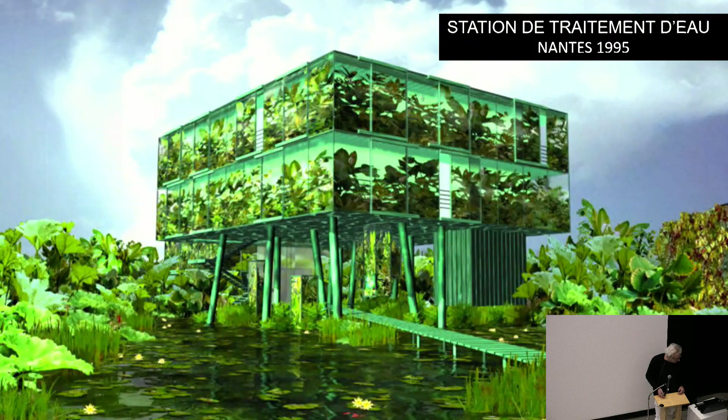This is another very old building I did, I think in 1995. It was the headquarters of a water treatment station. This picture was probably one of the first computer-generated images calculated in Canada. At this moment, the computer in France wasn't strong enough, so it was calculated there and sent back.

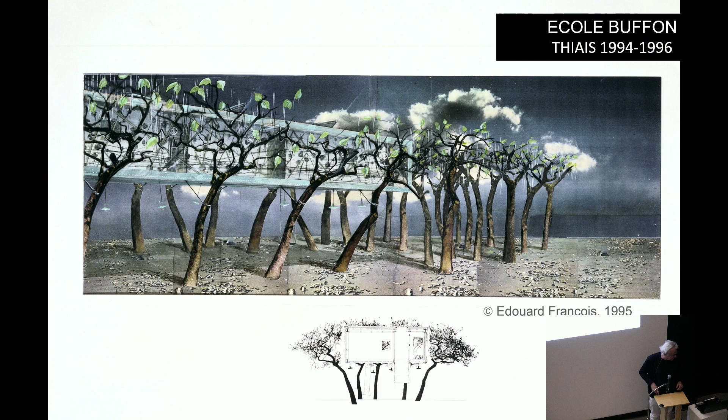It was being realized, a very, very important cantilever, so the children are in a sort of cloud over the floor.

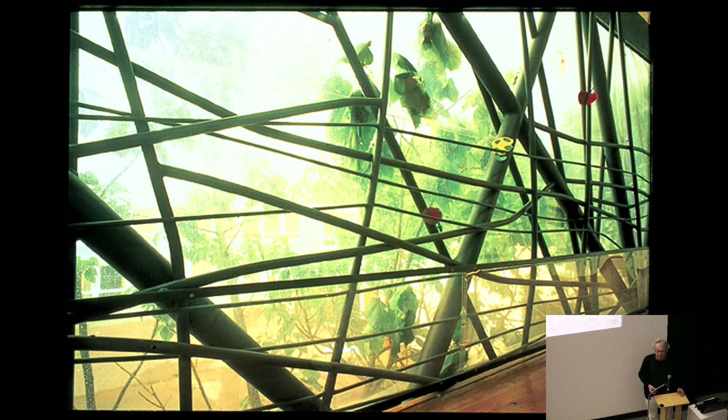The beam was something extremely challenging. This is the main beam. I didn't want the beam to look like a beam, so I designed it myself. I asked the engineer to calculate how big each tube must be, but told him he mustn't change the tubes. That's why you have very small tubes and very big tubes, and it was a very efficient beam.

This is from 2000, so 20 years ago. It was my first big commission: 60 flats in Montpellier, with a private developer. Private developers are quite difficult to manage because these guys only think about money.

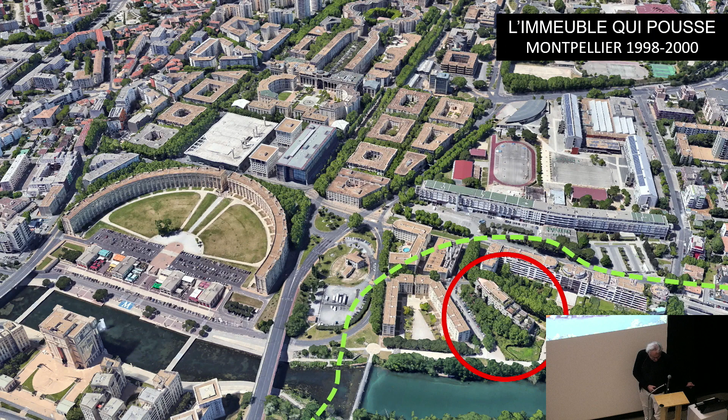It's like doing a tauromachie with a torero, and the client is a big bull and you are afraid. So when you have this kind of individual, you have to show models that are unbelievably strong, so they must be totally afraid. If they're afraid, they don't approach you, so you could have a conversation.

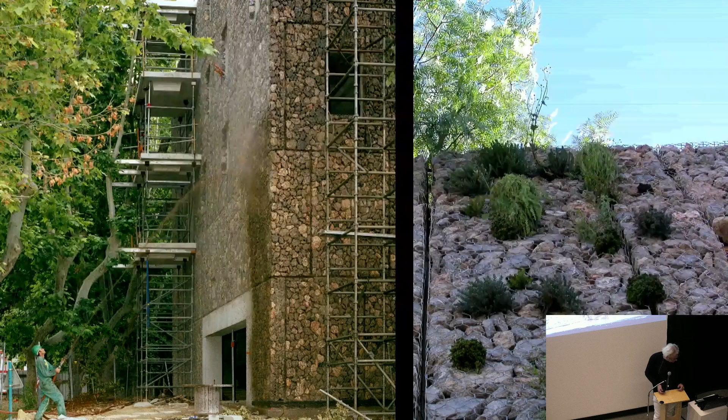It was a building in Gabion. I did that before Herzog & de Meuron did the winery. I have some relation with Herzog & de Meuron — you will see my project, and there's a lot of projects that are quite near, just 1 or 2 years after. We know each other very well.

So I was focused on making my building green. This building is for housing, and I asked the Minister of Culture to pay for shit to paint the building with seeds.

It was Jean-Jacques Aillagon, in 2000, and he said, wait, this is a very nice idea, Edouard, because my client didn't want to paint the building with shit, big shit. So it was the Minister of Culture who provided the funding. You see the guy who is painting.

See the guy here? This is shit, big shit, and he's painting the building. My poor client, when he discovered that, he was totally afraid, and it was a scandal in the city center because it was smelling horribly in all the city for 2 days.

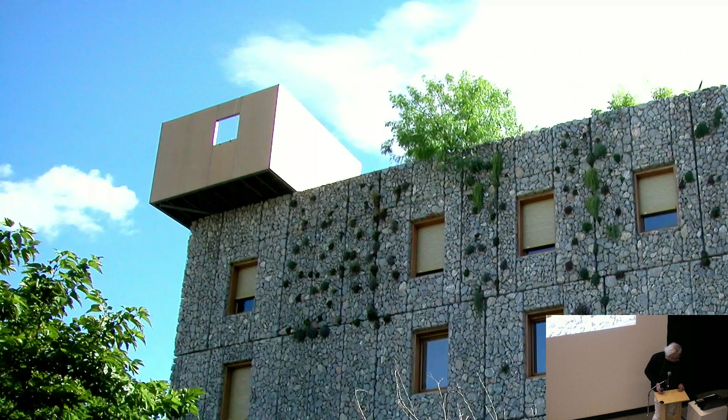After that, you have plants that go out of the gabion. You could see the balconies. This was an existing tree, and I didn't want to cut it, so I put just a balcony on top of it. You see here the vegetation is growing directly on the facade. This is a pilot of an Air France company who bought that, and I put a box for him that is in cantilever because he liked that.

And how did I get this commission? This is another story. It was one of the first new luxury hotels in Paris, a palace. I had been convened by the architect, a historical architect, and they said to me, Edouard, we had a meeting, and we allowed you to do a green building, a green facade.

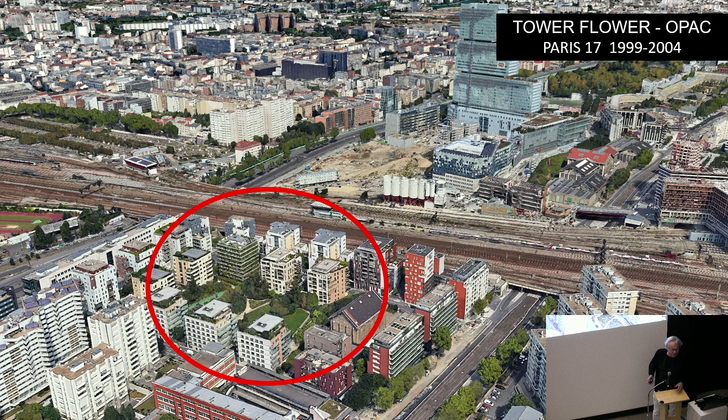And the dream of Christian de Portzamparc was to have the buildings behind that look through, so everybody is looking at the same moment at the park. And so we crossed that, and Christian de Portzamparc did a competition that I knew I would win. It was an arranged competition. In France, we used to do that sometimes.

This is the building, and this is the park, and my building, whose name is Tower Flower. At this moment, I wanted to do this building, this one, and to do a sort of very green space. I wanted to do a park also. I wanted to do a big waterbed, so when you walk in the park, you have waves of green.

But Christian de Portzamparc and the city of Paris said, stop, you do just this one and it's finished. So bye-bye the waterbed, the green waterbed with grass on it.

When you are dealing with plants, plants are so pretty that if you make the building behind it pretty also, everybody will vomit, it's too sweet. So you need to have a building that is very, very bad. So the whole building is in concrete, everything. And then after that, you have the plant.

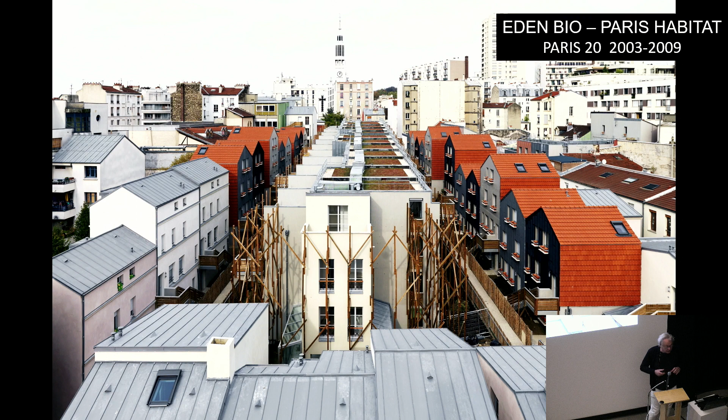And to make all this huge block correctly connected to the city, I designed these buildings - this is something that is very important in my work. I designed these buildings there, here, and these ones that are a copy of existing buildings just nearby. So it's difficult to see if it's existing or not existing. The things are fitting together. For example, this is a building that was existing. So try not to demolish everything and try to make your urbanism totally connected with the context.

This was the first image, when we delivered the building. I put all the money in the soil, and I put very small plants that cost €1. This was a tree that I liked. It's another story, but look, all that cost €1. And I put all the money in the ground.

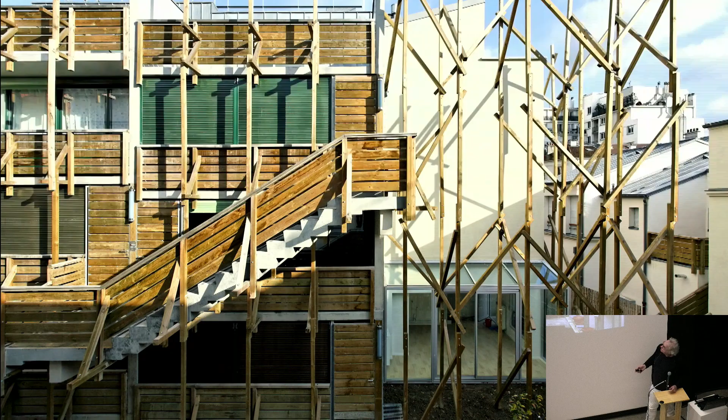I put organic earth, Demeter, 1.5 meters deep, so it was extremely costly to put all this ground. This is expecting plants that will arrive, and it will be a wild garden. You see, there was quite nothing. And in 3 years, it becomes totally a wild area with plants that are exuberant.

I will show you. So this is how it was with the model, how it was at the beginning, and what I expected. In 2018, look, it's totally green, and now the plant and the building are totally connected together, and it's dealing with the problematic of seasons. Sometimes you have flowers, and the guys are living inside that sort of green building.

You have the streets here. I wanted - I like very much the staircase when they go to the sky. And so you go to your flat, taking here, and then you go to your flat, you go to your flat, and you go to your flat. And it is inside a big block. And inside the block, you don't need to have an entrance with a corridor that goes to an elevator. It's better to go directly looking at the sky, and then you enter your building.

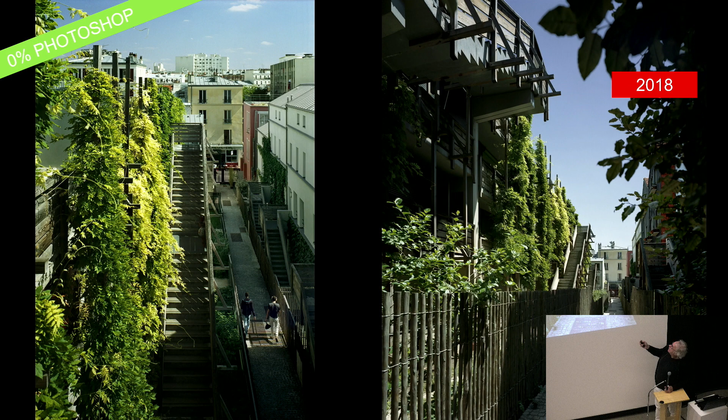Quite recently, in 2010, it was the first tower in Paris, a new tower here. And so the town mayor made a competition that I knew I would win because it was totally organized - they wanted a green building for the first new towers, because the problematic of towers in Paris had been stopped in 1970 by President Giscard d'Estaing, who said, I don't want to see towers from the Élysée. And so it was stopped.

And the first new tower in Paris is 50 meters high. It's a small tower for you, but in Paris it is something very big.

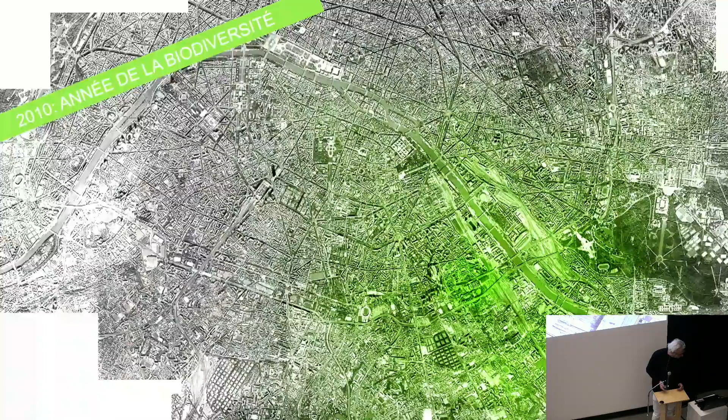And imagine a tower that is dealing with biodiversity. So on the top of the building, all the plants will be totally wild. We will go with the students into the forest to find seeds. And the quality of the biodiversity of the seeds - when they grow, they will disseminate seeds wild in Paris to regenerate the biodiversity of Paris.

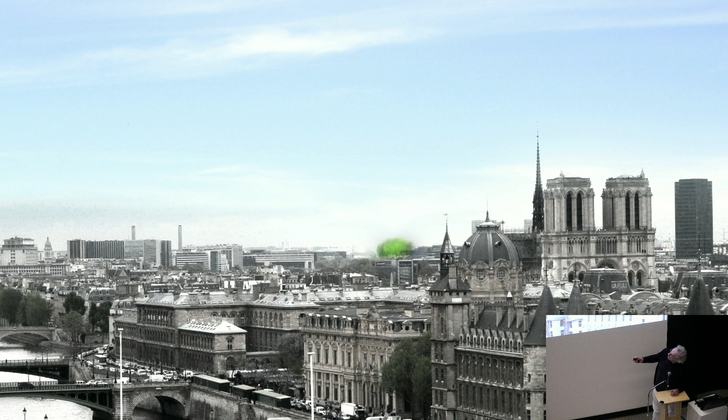This is the image for the competition. I said, yes, this is my building. And they said, oh, Edouard, it's very nice, we don't see anything. And they asked me about this little building - they said, is it an extension of you? I said, no, no, it's a tree. Oh, it's okay. And this one also, I said, it's okay. So it was the most politically correct picture for new buildings, new towers in Paris.

That was the models.

This is one plan. Here you have balconies. Here you have a sort of pathway. And here you have the pots. And the pots are just 30 centimeters diameter and 3.5 meters long.

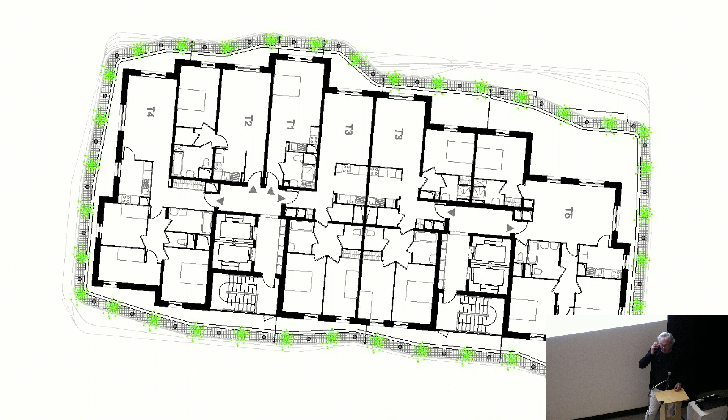I was dealing with the botanic guys to find plants that like deep pots, so we make very deep pots, and the roots go 3.5 meters deep. So they like it very much. You have this kind of plants you find in the mountain, where the roots go in sort of holes in between the rocks.

These are the details of the tubes. A big tube in stainless steel. This is the automatic irrigation.

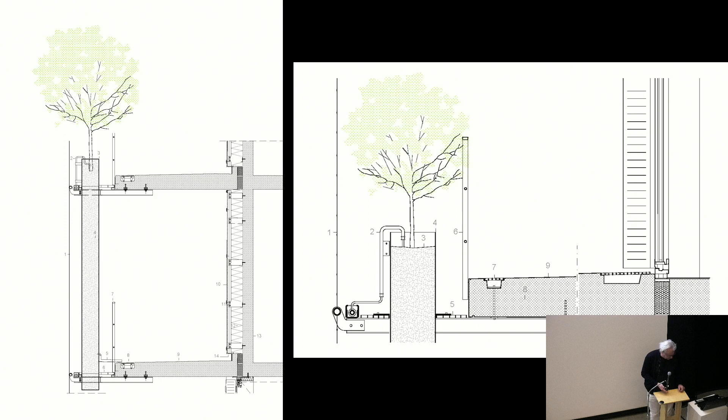With the students, we go in the forest to find the seeds. And this is a botanic garden, and these are the plants that come from seeds that were taken by the students. So they were educated without water and without engrais, without Monsanto.

You have to know that plants, they are like humans, they are drug addicts. So if you give them a lot of food, a lot of water, after that they say, please, more. In nature, they have very little water and very little food, and then they are very strong.

It's a little bit like a cat. If you buy a cat from an industrial gardener and put it in your garden, after 2 days the cat is dead. If you buy a wild cat and put it in your garden, after 2 days the cat is not there. He's gone.

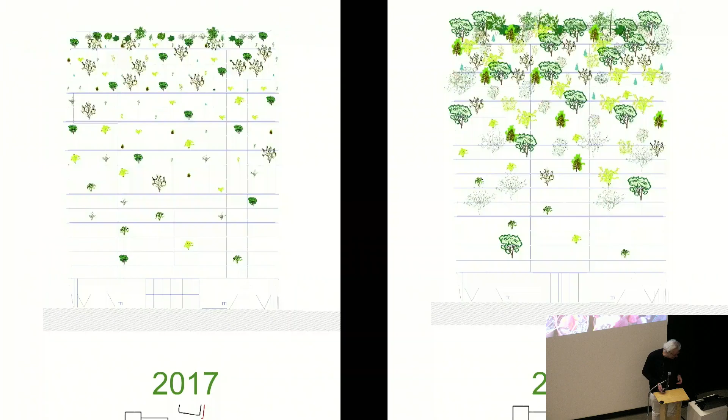This is how the seeds will grow. You have very small plants, and then it grows a little bit more and a little bit more. So for this project we did experimentation. These are the tubes, on top are the plants that we put to make them grow. So they are very small.

I'd like to deal with patience. Everybody, when they are dealing with nature, wants the thing to be totally green immediately. Sometimes, to go slowly, it's a process. So it's a very interesting process.

So we put the tubes here, and some tubes directly inside the ground, because we want to observe: when the tubes are outside with the sunshine, they get hot, and when they are inside, the temperature is quite stable. But finally, it grows better in tubes that are outside.

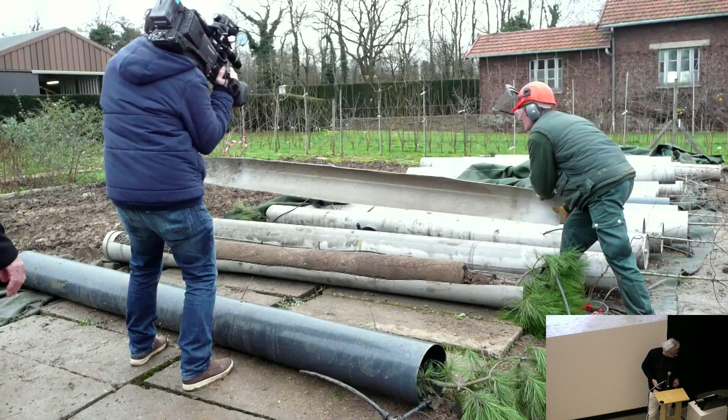At a certain moment, we have to close the experimentation, and we have to cut the tubes to see the progression of the roots. You see here, the roots are growing inside.

The television in France, they like very much to come in my office because I'm quite a funny guy. They said, Edouard, do you have something? Because we want to do a reportage on your office that is very interesting. I said, yes, we are cutting tubes, it's the end of experimentation, and we will open it and see if the prototype is okay or not.

And I said, yes, but it is risky for the project because we will do that live. I said, that's okay, we will do it live, this is life. And so this is the guy who is making the film for the Friday evening news.

The progression of the roots was incredible, you see, they were 3 meters long. So that means the experimentation was correct. At first the plant didn't grow very much here, but it prepares the roots. So we know the building will be green in probably 6 or 10 years.

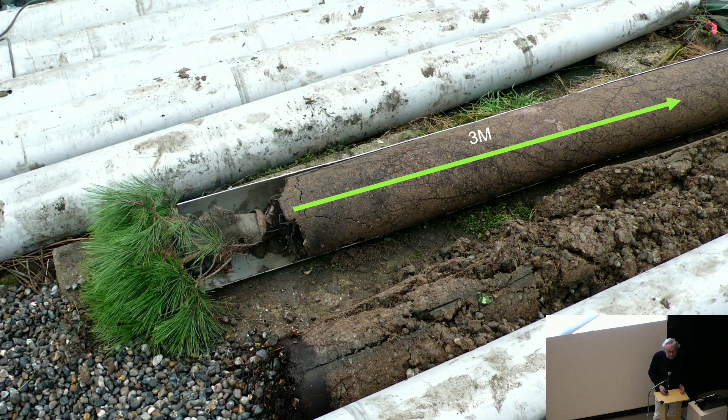Expecting the plants to be big, I chose to put a material here that deals with a future green. And I had the intuition that it could be titanium. It's a green titanium. This is the color, the natural color of titanium.

Nobody knows how to do it. It's very, very difficult to find titanium like this. And I found a guy in Japan who was making glass like that for a tea ceremony, in titanium, colored like that.

So when you put titanium in water with electricity, the color naturally changes. And the Japanese guy agreed to extend his factory ten times bigger to produce the facade of the project in France. So it was a very interesting experimentation.

We went to Japan, to this ephemeral factory, to see the guy producing all the titanium. And I chose titanium because we have to deal with the recycling problematic.

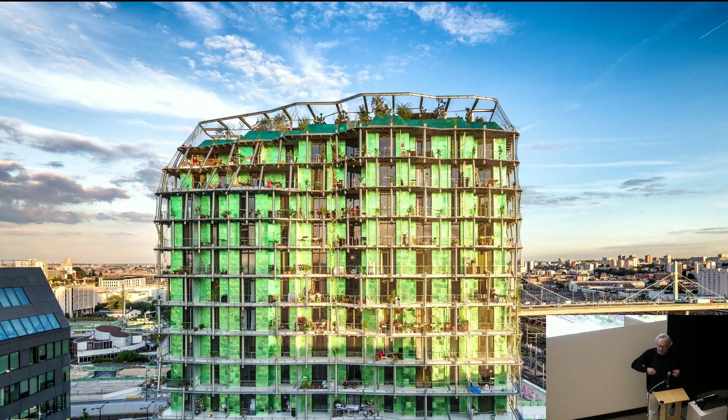This is the titanium facade, piece of titanium. This is the building. Different views of the building. You see the plants that are growing slowly, and we have oaks that grow very quickly in this tower, in this condition.

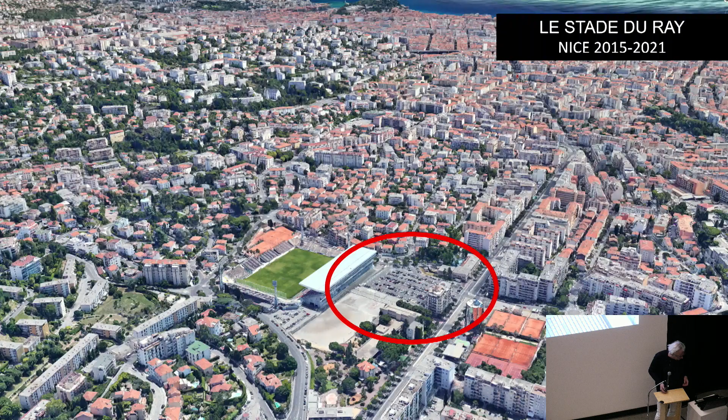Now it's a new commission that I have. It's in building, so we are doing it now. We are doing a commission that is 40,000 meters square, so it's quite big, 350 flats. It was a competition that wasn't organized for me, but I won.

Here you have the stadium of Nice, and all this area must be demolished to do a park. This is going to be a new area for housing and retail. I concentrated all the buildings here to do a huge park, and I want the park to be in relation with the building. But here we have one main urban street of Nice with buildings of a certain scale, a certain quality. And here we have the development that is in relation with the park. So we manage these two problematics.

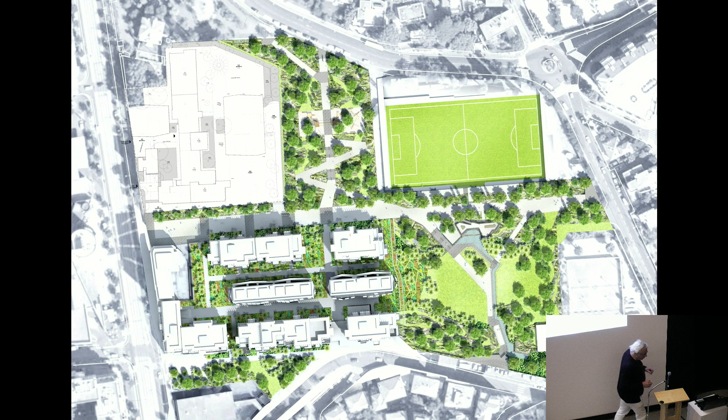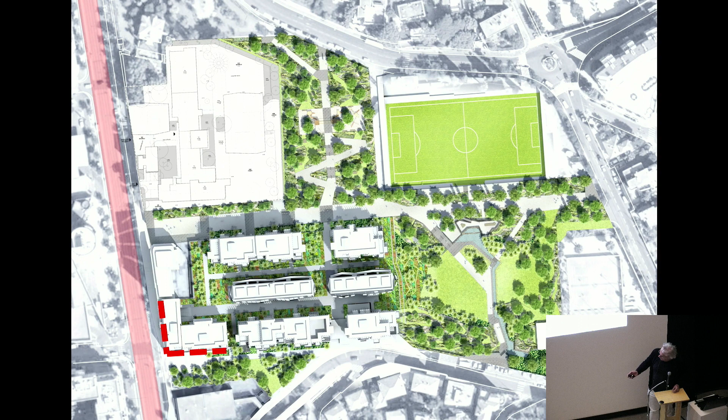Here we have the corner. We did the corner here in front of this Boulevard Gorbella. And at the corner, we did very thin buildings. Here, this is one building, another one here, and another one here. So we are in the scale of the Nice Boulevard.

Something important in our work is we are doing metropolitan architecture, and the specificity of the metropole, the materiality of the metropole, is stone. So we always now are building with stone. For example, this building, this little one, is massive stone. As with the project before, I wanted when you see a building, you could understand that this is for Nice.

So for example, this is a copy of a building that is in Nice. But it's not a boring copy like Disneyland. It is a copy made by a guy who is totally passionate about Nice buildings. So it's exactly a Niçois building. All the details are informed, and we introduce that into the huge block. So we have little pieces that are totally in the scale and in the spirit of the area.

This is the elevation. You could see Le Petit Niçois here, two buildings. Because we have to take care about the scale of the city, and the city is made with these blocks. The only block that is allowed in the city is the forest. A forest, so this will be a forest. In a forest, you don't have to cut the trees. A forest, you can have a huge piece of leaves, of trees. It's not like buildings.

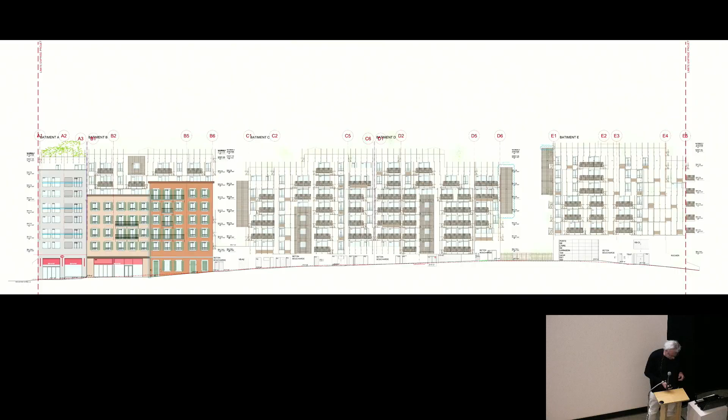And after that, everything in green will be a green facade in relation with the park. So this is the green facade. What is important now is I believe that after a certain number of experiments, the best way to do a green building is to have the floor underneath, and you put plants, and the plant grows from the floor. So here you have the trees, and when you walk in the street, first you go at the first two levels. So this is very important.

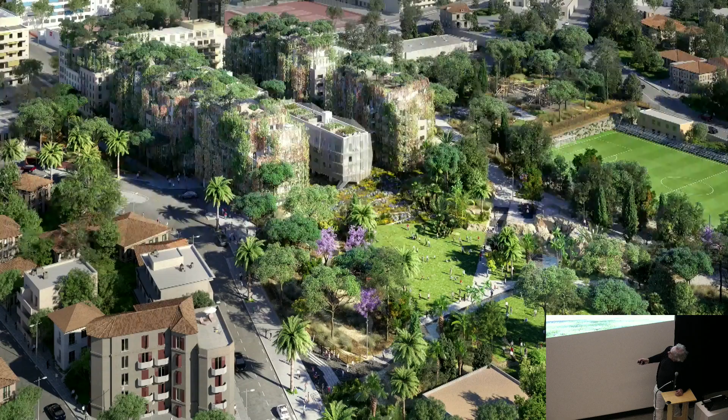This is the other angle, so everything is green. This is in the park. This is from the park, and I will show you how we manage a new green facade.

We are doing a lot of studies in botanic. So here you have the plants that are going. We have pots, we put pots. And after that, we create something that we name Internet des plantes. It is the anastomosis of the aerial way. Anastomosis is, here you have the pots in red, and we're going to connect all the plants together like that.

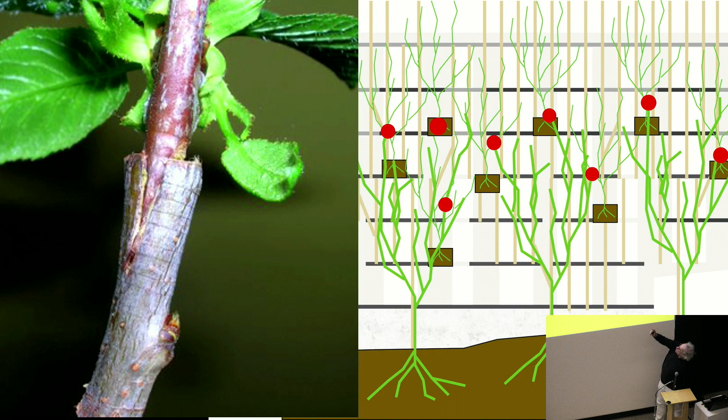We are connecting all the plants together. After that you cut, and they don't need the pots because it's only one big plant. When the plants on the north facade have problems with sun, they ask the neighbors through the connection to give them the food or elements they need.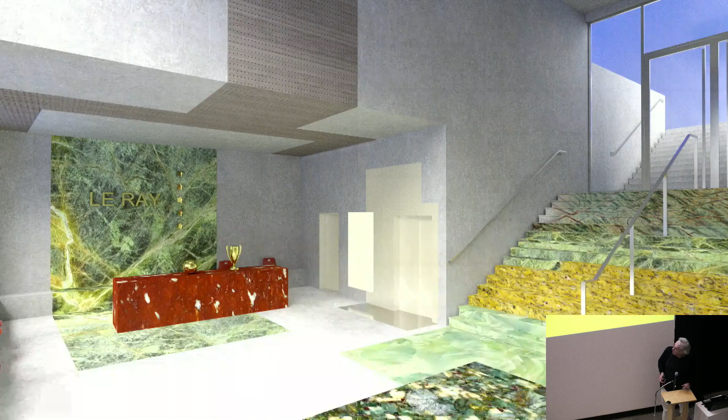This is the inside, with all the marble you could find, totally random. This is a cup of Nice because it was the past stadium, and you can see the detail of what was here inside the stadium before. Different views, and underneath you have a huge supermarket. This is actually on the site.

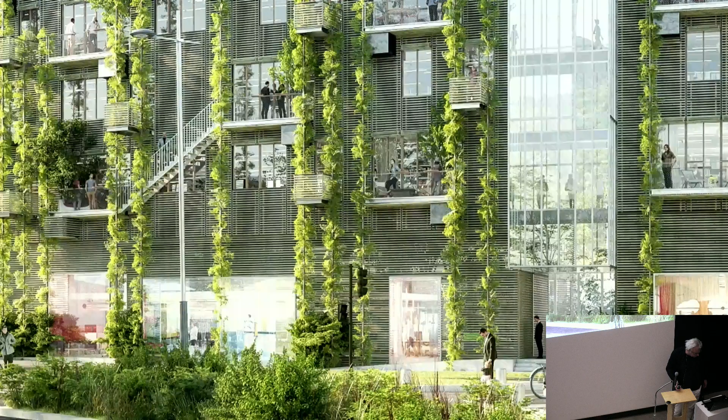These are different buildings in Grenoble that were done with the same process.

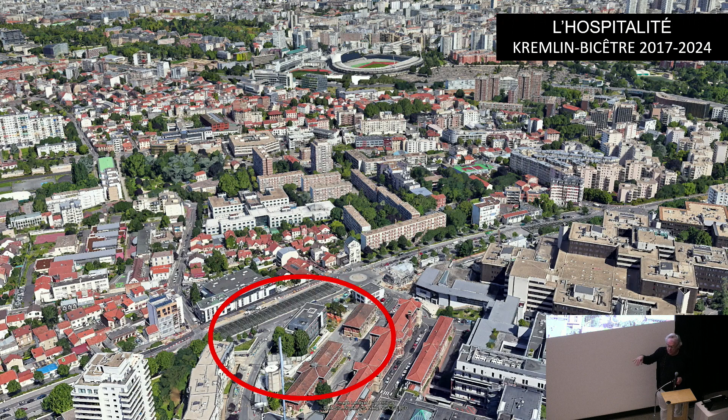This is a new tower we did two years ago, the Grand Paris Express. We have a metro underneath, a new station, and on the stations you will have towers. This is the new tower we developed. We have a sort of green signal, and underneath elements that are totally coated with a strong materiality in stone. On top we will have a bar, a rooftop, sharing the view of Paris. So the building is...

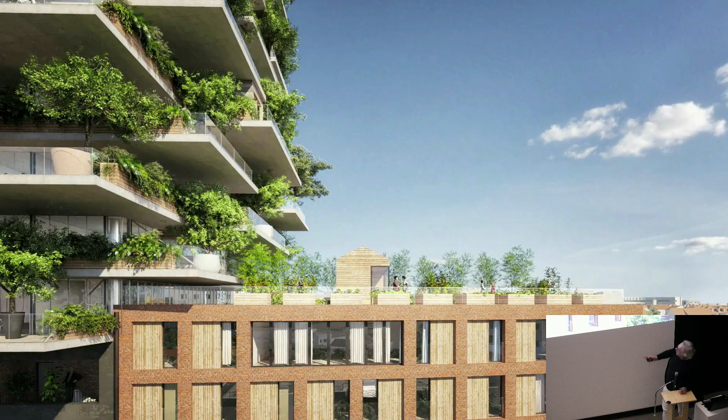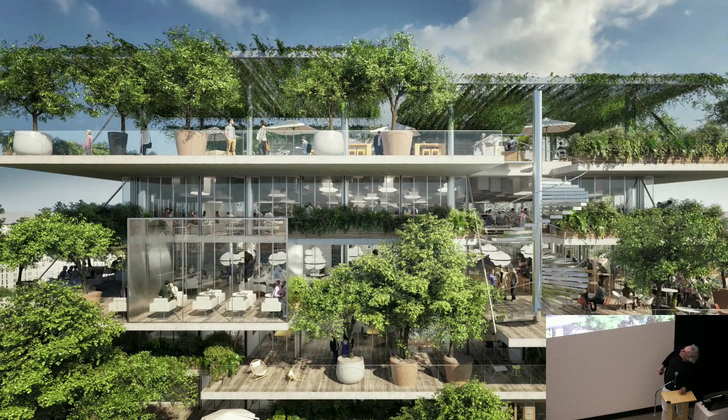On building now. Other views. Materiality - we're dealing with urban agriculture. And this is the rooftop, a big rooftop.

Another very interesting experimentation we are doing is in Bordeaux-Brazza. Actually, we don't want to design the facade - I think it's a shitty problematic for an architect to design facade. So we imagine doing a sort of structure, very boring, very simple, and we deliver not flats but volumes. We sell volumes, and the guy who buys does his facade himself. So he could do full windows, a lot of windows, two windows - it depends how he wants to organize his flat. He's only obliged to do it in wood.

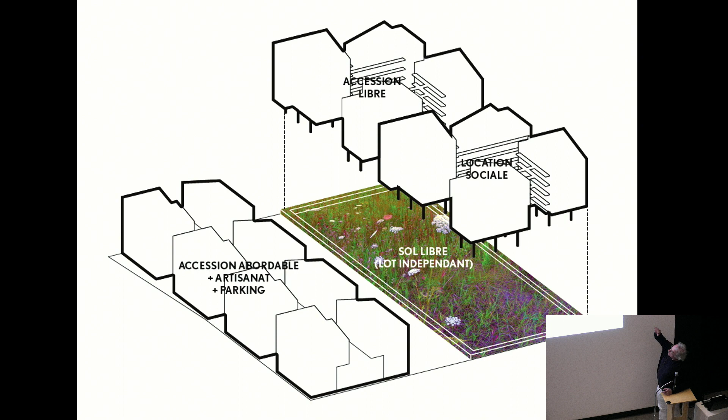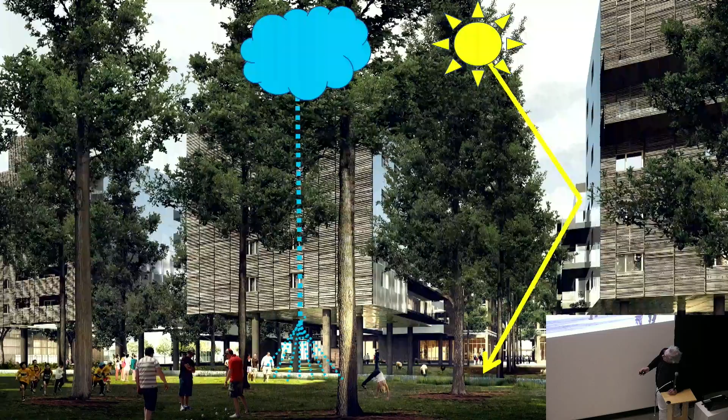One part of the building, we want to do a huge agriculture area for animals. So we put the whole project on pillars - you have all the pillars, and you could see animals underneath. Everything is on pillars, you have the animals here. When it's raining, it goes there and we have a sort of shower, the water returns underneath. All the buildings' facades inside are stainless steel mirror, so the sunshine goes inside. This is a private area for agriculture, so no one can enter.

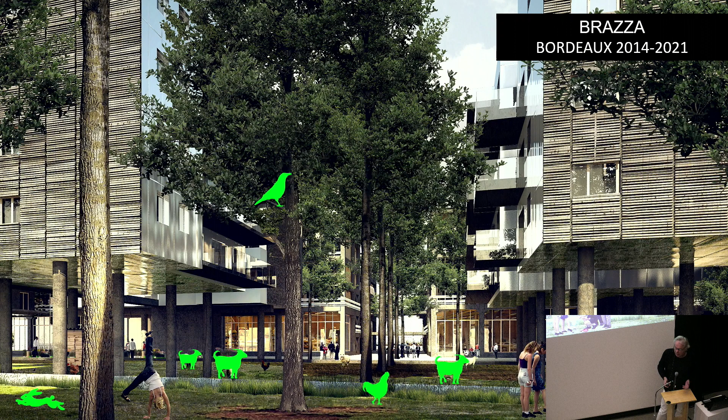This is one of my best experimentations, I think. It's an independent terrace. It took me a lot of time to arrive at doing that.

I saw it - it was eight years ago, in 2007, no, a little bit more - I saw the problematic of towers. In Paris you have towers, and I said, Edouard, you have to prepare yourself to do a tower, because you don't know what a tower is. You are in Saint-Germain-des-Prés, in a very chic flat, you see the Eiffel Tower in a city center, so you're in a very bourgeois flat. And I said to myself, you have to live in a tower to see what a tower is first, because designing a tower is something quite big. You don't know - when you design it, it's huge. How huge is difficult to know.

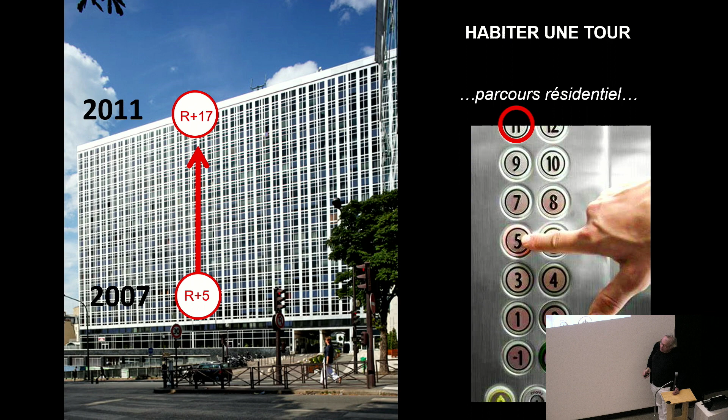So I took a flat here at the 5th level. When I go to my flat, you always have a guy who's pushing the last button - it's like he puts a finger in your eye. So for me it begins to be unsupportable when I go to my flat. Here, a guy said, oh look, and he pushed. So I asked the owner to go to the highest flat. He said, that's okay, you could go to the highest flat.

But the highest flat was the biggest flat - it was the past flat of Marguerite Yourcenar. I changed all the decor of the flat - this is the new decor. This was my living room, this is the view, this is the bath - a bath inside the living room. So we take the bath and look at the view. It was really fantastic.

And after a certain time, I said to myself, Edouard, it's not possible to live like that in such a big flat.

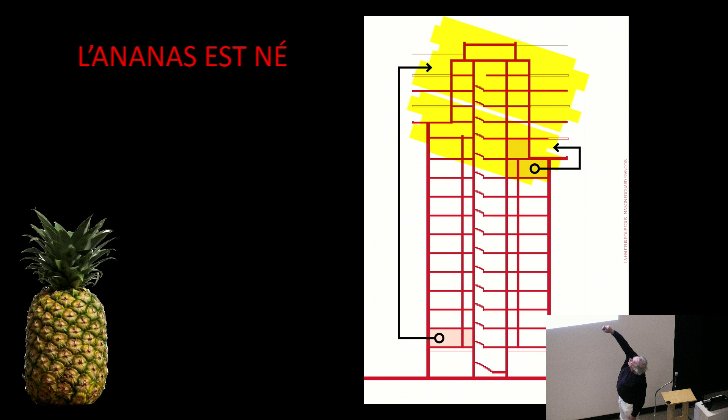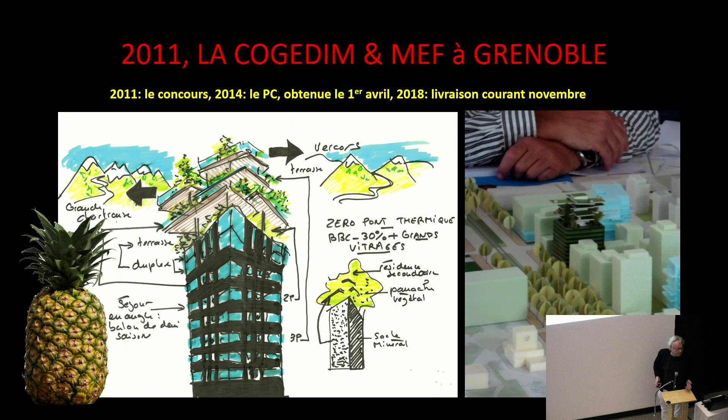So I went with my pineapple to find a client who wanted to do a building like that with me. I had to design something more acceptable, so I made this section here about the flats. And I found a client who was interested in that. This is the first building - this is Christian de Portzamparc here. I found a client, but I had to find a site, so I asked Christian de Portzamparc, do you have an urban site where I can put my pineapple? And he said yes, I have one in Grenoble.

This is the entrance here. You have the position of the pineapple, and this is the entrance. These are for a typical level. There's no balcony on the building, so here you have a sort of balcony for the middle season. It opens like that, creating a middle season balcony. You could see here.

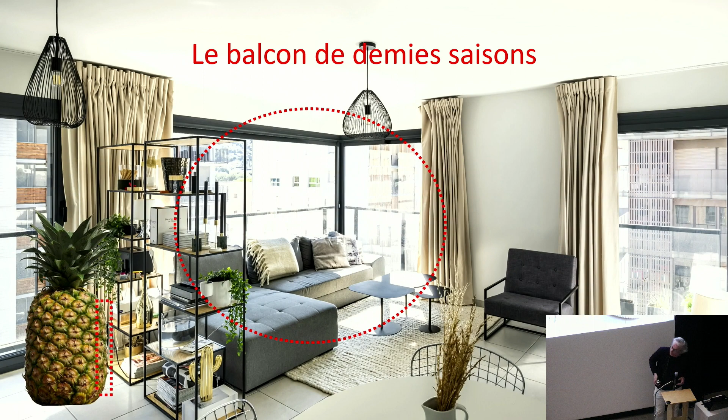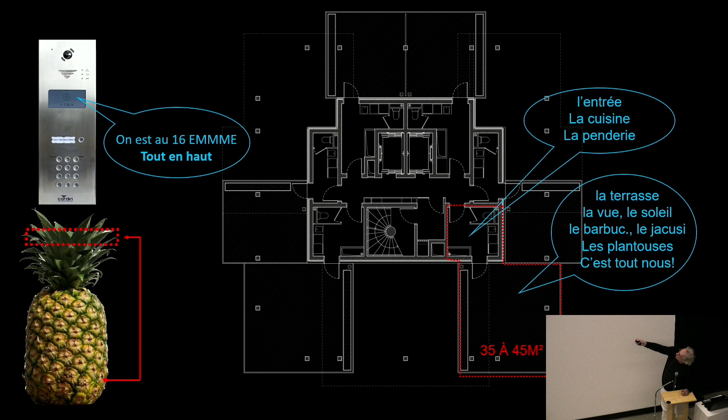And when it opens, we associate it with a terrace. This is the terrace - it's a very huge terrace, 35 square meters. You have a little private area with a toilet, a little kitchen, storage, and then you have a huge balcony. You have the view, so everybody is sharing the view. This is the highest flat with the lowest balcony, but the lowest balcony is okay. It's like that.

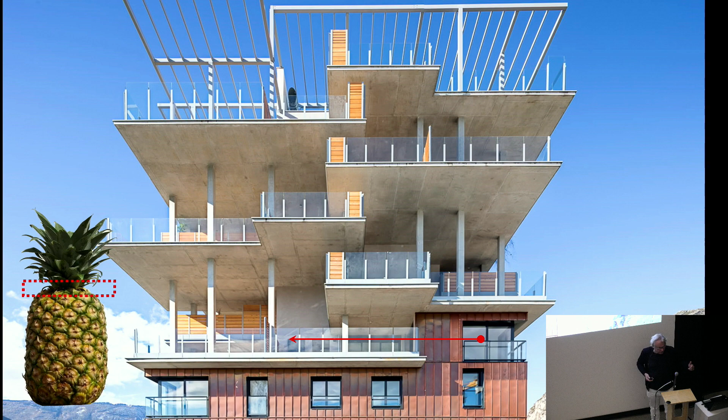Everybody is sharing, and this building has been sold like that, mixing the properties. So when you have a flat at the first level, north facade, you will have a terrace at the highest, south facade. We share orientation, altitude, and views for everybody. We are on top of the pineapple. The building was sold in one week - everybody wants to have that. Afterward, you have guys who buy a flat and a terrace and rent it out, and you have a queue of guys wanting to rent there - it's really impressive. We share the view. We're totally in Saint Matthew, and so we create a new function.

After, when you have a flat, you have the parking, you have storage, and then you have a terrace. What's interesting in this model is if you have only a little money, it's difficult to buy a flat with a huge terrace, because you think, if I have a bankruptcy problem, I cannot sell the terrace. But with this project, you can sell your terrace - the terrace is totally independent of your flat.

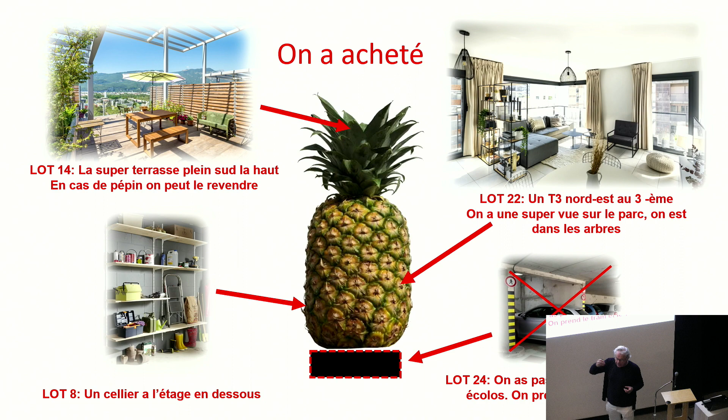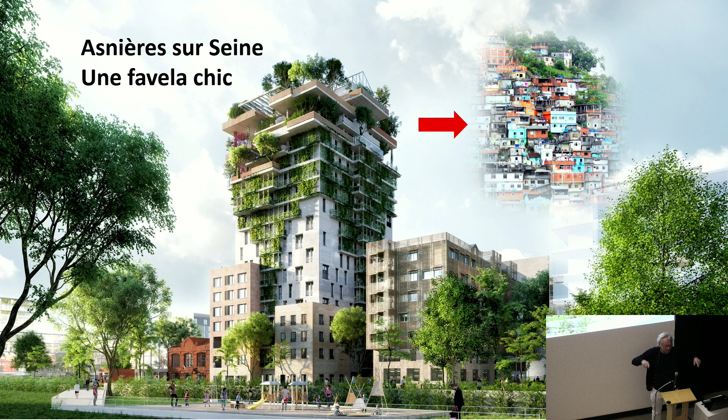You have an elevator that goes directly to your flat. Near Paris, we're doing a favela on top of that, so everybody could do everything they want. They will choose the fence, the facade, the plant. I wanted it to look like a huge favela, and it's actually in commercialization now. Everybody is very happy to choose his own fence. So we asked some guys to make it very baroque, in wood or in steel.

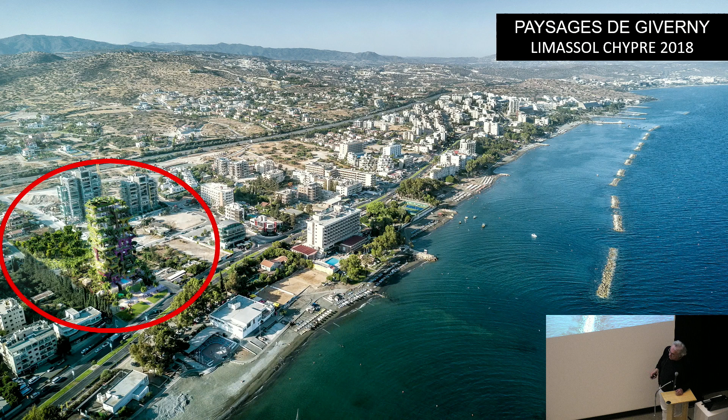I did a little book, La hauteur pour tous, altitude for everybody. This is another funny project we have, in Limassol, Chypre. It's for the owner of EasyJet, a nice lady, and we were thinking about it - she wants a super building for Russian guys who have a lot of money, and they want an extravagant building.

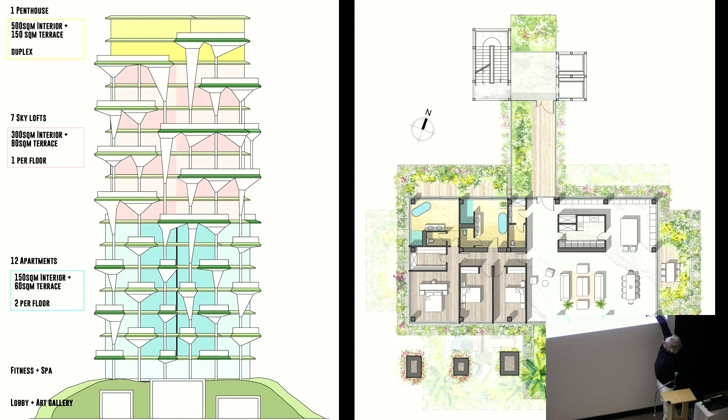So we imagined pots shaped like this, to have a swimming pool inside and huge plants, different ones. This is the way it's organized - we will have a lot of typologies of plants. We're dealing with the problematic of mycelium that is very important in the floor, and this is a huge system of vertical corridors of mycelium. This is a different section, showing how it's organized.

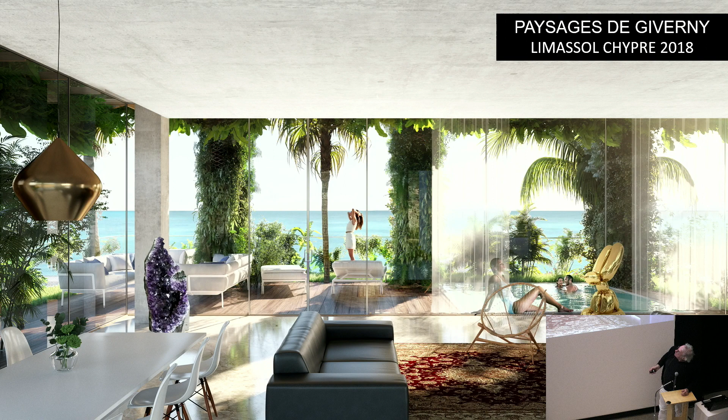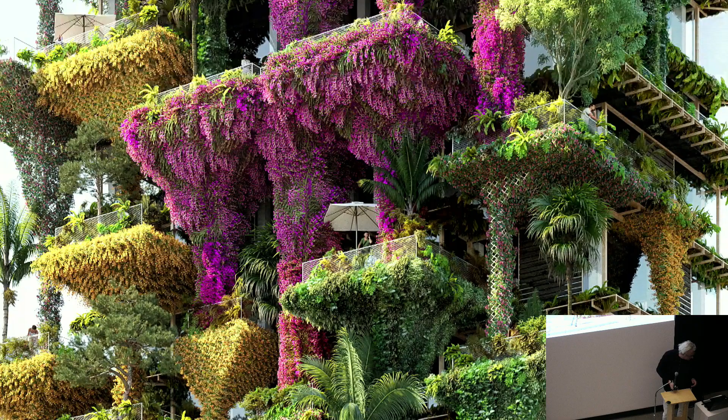This is the building when it will be delivered, and this is the building 2 or 3 years after. You have the plants growing from one entonnoir to the other. This is from inside - you have the pool, you see the trees, it's like a sort of a villa. This is the building, this is a detail of the future building. In terms of nature, we could do extravagant things.

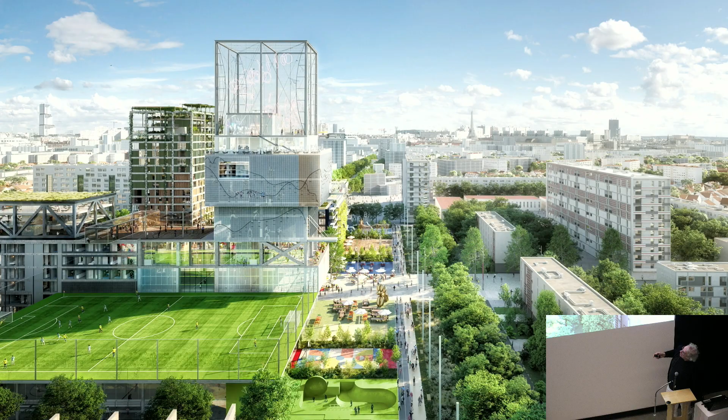Everything is dealing with nature, with plants, with climate. This is one of the last projects, the biggest project that we have - it's 80,000 square meters in Bordeaux.

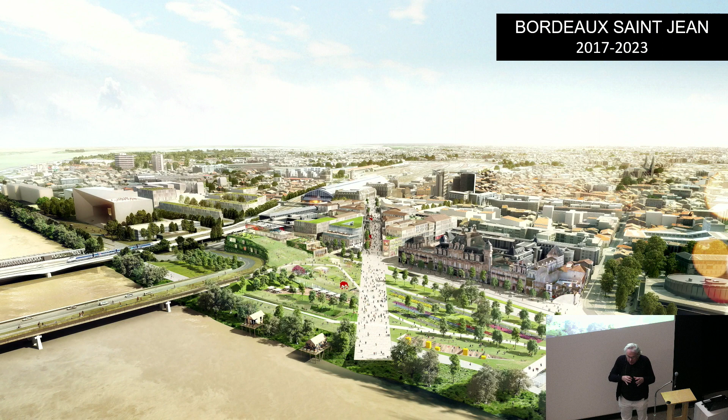We are in a UNESCO area, so it's very difficult to build there - it's very sensitive in terms of historical architecture. And this is the railway station, now connected to Paris by the TGV. They asked me to make a better connection between the railway and the city, because they were not connected.

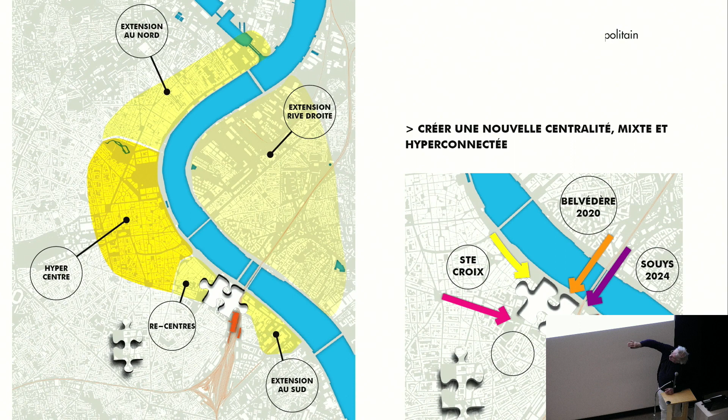We imagined something very simple. In Bordeaux you have La Garonne, and we connect the station directly to La Garonne, creating a new street. This new street demolishes a big area, so we have to rebuild all of it, as a mixed-use program. Here you could see our area - it will connect different parts of the city.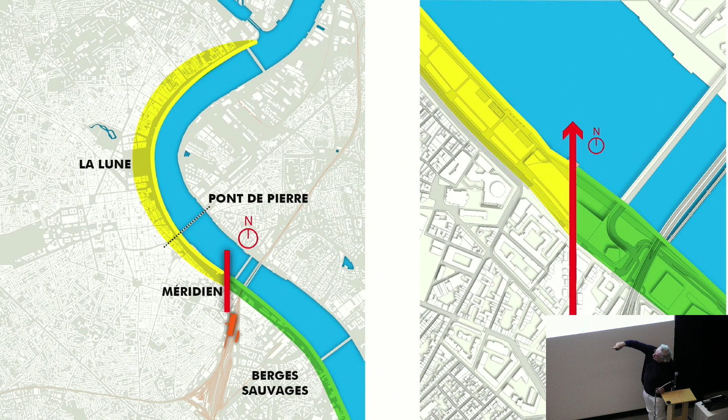The name is the Moon in Bordeaux. It's this huge yellow Les Quais port, and then we have our Méridien that goes from the railway to the Garonne. After that, we will change the landscape here. We had to design nearly 4.5 kilometers of facade for this project, so for an architect it's totally crazy.

In a UNESCO area, how do you begin your story? It's like a novel, how to write a big novel. So we made an analysis of the historical city, looking at how big all the buildings are, and we chose some buildings in Bordeaux because they look very Bordelais.

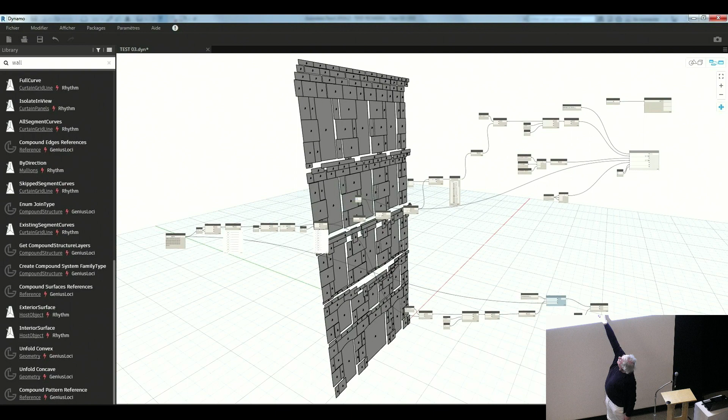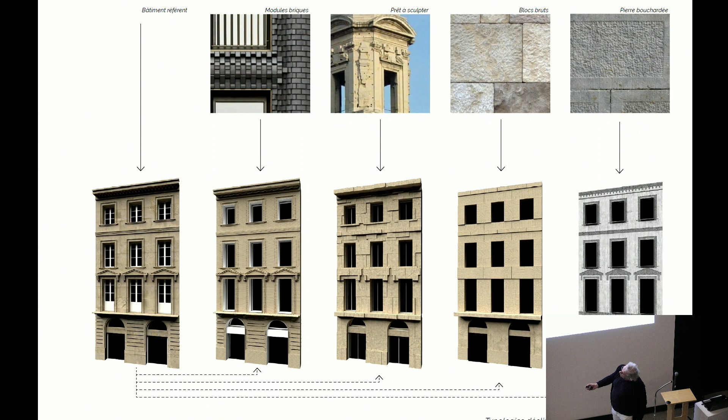We put a parametric treatment on them - it's like electricity that you put on the building. This is Dynamo, where we introduce parametrics and change the facade. This is the facade we chose, interpreted with bricks of stone, interpreted with big blocks, the biggest blocks. This one, if you polish the building - we have a lot of different treatments, all in stone, this one with big blocks.

This treatment has a certain affinity with the original historical buildings. We have the negative, like a Rachel Whiteread of the building - so we're building negative buildings in stone from existing buildings. It's quite interesting. And when we cannot arrive at that, because it doesn't fit when you do a block, we do green buildings.

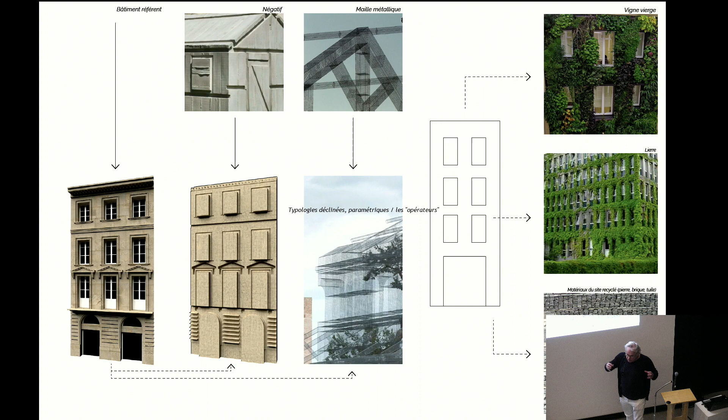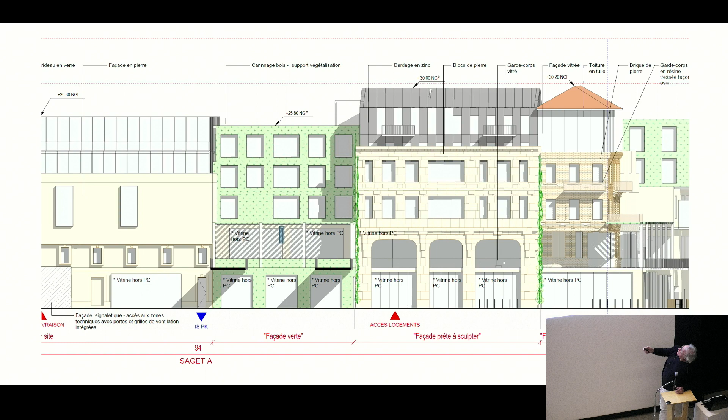This is an example of the street. This is a green building here, and we have attics that are totally different. All the building will be ridden by climbing plants.

The whole project deals with the problem of green area to create freshness in 2050, when the climate will be totally disorganized. So our question is how we could put as much plant as possible. Here the floor cracks for plants.

You have vertical plants, and we have a lot of trees. This is a commercial street with a lot of trees and plants.

We don't put the pathway and the building connected. We have gaps with plants, and it is a retail street, and we convinced the retail like Zara, like Adidas, to have plants in front of their big windows, and they are very happy with that.

And they said, Edouard, it's okay because we put plants inside the shops where we sell, because everybody now wants plants. So if you go in a new Adidas shop, you will see plants inside the shop, and so they like it to have in front of the shop.

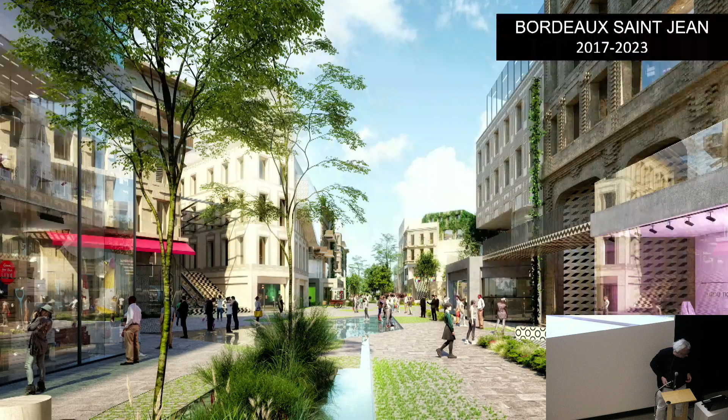This is the main street. We're dealing with the problem of water. So in summer, you have watering everywhere, very little water, probably half a centimeter.

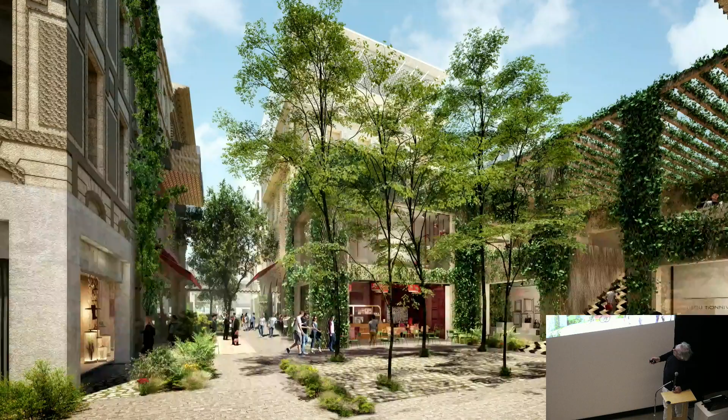And we torturated the building, so sometimes we plug things onto it. We plug new balconies in a different materiality, where we have some signs that you can find in different areas.

So you see it's ultra green. This is the entrance of the area.

We maintain all the existing buildings that were there, but we extend them. We move them sometimes. This is the entrance of the area.

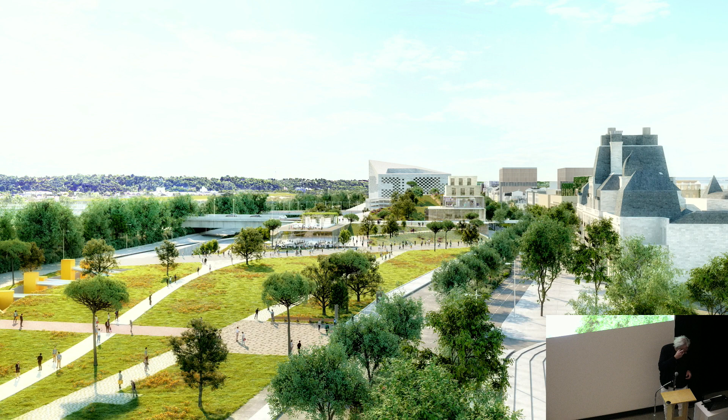This building is made with a pixel of stone. This is another area. We received the administrative authorization for that a couple of weeks ago.

And to finish, we have to do a building here. Here we have a big railway, the motorway, an échangeur.

This is the moon here, and we make the landscape go up, and then escape over all this, to the railway bridge and all the roads behind.

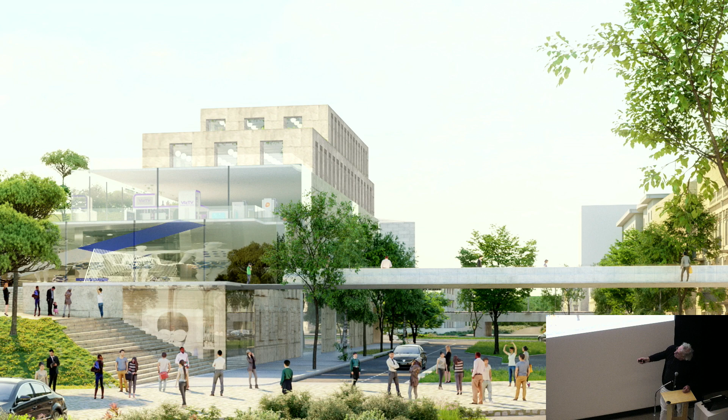This is the building to finish the project here. And you see the landscape that is going up to finish.

This is all the beautiful areas of Bordeaux, the moon. So the moon gets up, with the trees.

And underneath, this is a big retail area. And these are the parts of the street that you will see underneath. This is the view of the retail.

So you have the main road around, sorry, around this, the end of the moon. Different views of that.

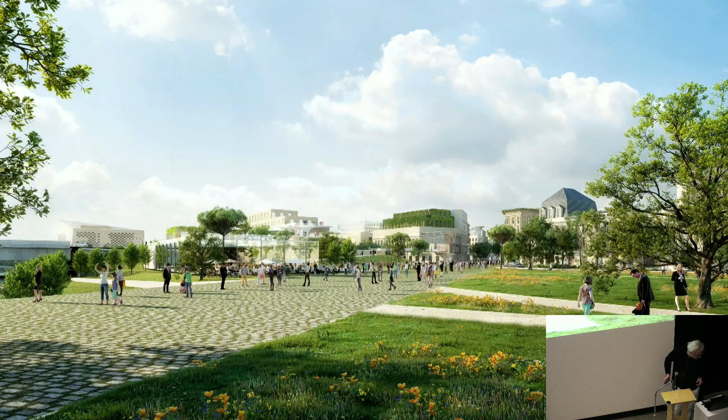So we were in the UNESCO problematic, dialoguing with the historical guys to do this kind of project.

This one project is more, very small. It is a little house. My gallery asked me to do a little house that will be edited in 10 samples for very rich guys. So this is one sample that you can have, an emir who buys it in the field with the camels.

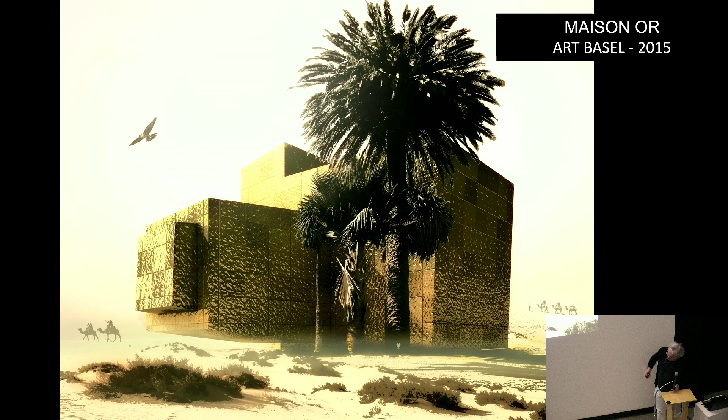And I arrived to the idea to have something that could move, change place. The material that fits the best with nature is gold. So we will do a building in gold. So this is the structure of the building in gold.

The way it was built, it was exhibited in the Basel Fair. The idea is to have a shape that doesn't look like a house, it looks like a sort of curious piece. Inside, it is all in Ipe wood, like a box, a cigar box.

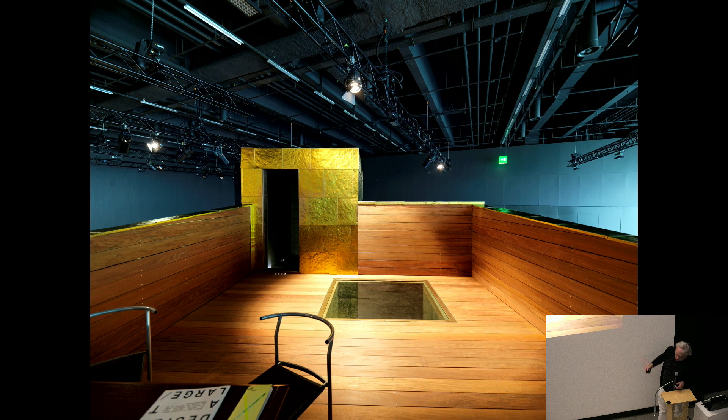This is the rooftop. This is the shape. It's better to look like something like a Kunst in a house like that, but the function is very simple inside.

And collectors buy it. This is a very rich collector who bought this house for himself. Brad Pitt and Angelina Jolie bought one to put in the winery. And this guy bought one to put in his garden in Saint-Tropez.